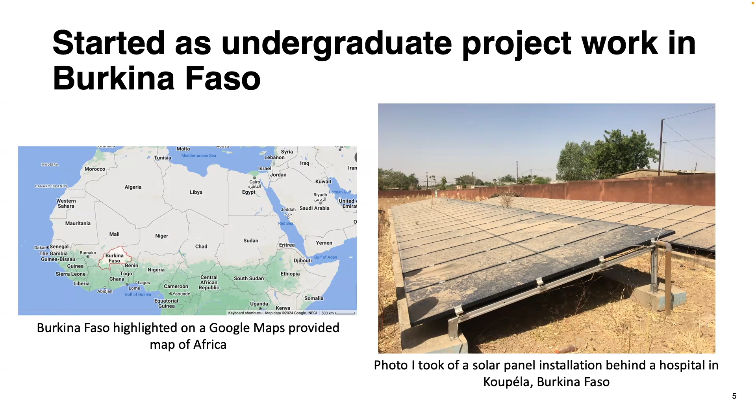One of the primary reasons was because we noticed we weren't generating enough energy. And so I took a lot of pictures while I was there. Here's a picture I took of the solar panel system behind a hospital that was covered in dust. And as I reflected on my journey in Burkina Faso after returning, I began to ask myself, could desert dust be having a significant impact on solar panels in West Africa?

I've done my graduate studies here at MIT. I was actually working on a different project at the time. But I kept coming back to this question of what is it going to take to be able to get these incubators working and operating while in Burkina Faso. And so that led me to ultimately actually step away from my program after my master's and move to the region to Ashesi University in Ghana to really understand and learn more about what it's going to take to get these systems working in the context.

So what you can see here is that when it's near the Gulf of Guinea, dry, dust-laden air from the Sahara Desert is blowing into the region, being suspended in the atmosphere, and then eventually collecting on the panels. Then, as the Earth continues to rotate around the sun, the ITCZ shifts northward towards the Sahara Desert. You get this blue, which is actually the rain belt. So the rains come, you get the monsoon season, the rains wash the dust out of the atmosphere and also off of the surface of the panels. And then once again in November, the cycle starts again, and you get the Harmattan season. So we expect those seasons between November and March each year.

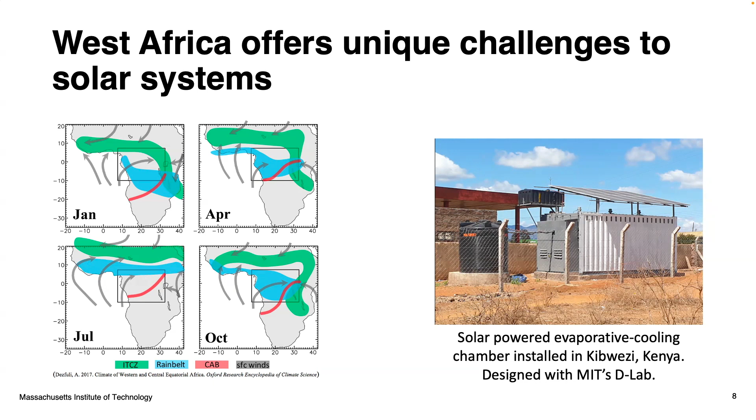So this poses a unique challenge to solar systems in West Africa, but it's not the only challenge. One of the other challenges is related to how we actually implement these solar systems in the region. So this is an example of a project I worked on with MIT's D-Lab. We're developing solar-powered evaporative cooling chambers to keep vegetables and fruits from spoiling due to the environment and the heat. And so what you notice here is that this is what I call a decentralized system. It's not connected to a grid. It's not part of a solar farm. It's operating individually and has a unique set of requirements.

And additionally, you can see these images here. This image I took on a roadside in Accra, Ghana, where you can see these solar panels installed on top of these towers. Not entirely sure what they're powering, but we know that you see them everywhere. The same is true in other parts of the planet as well, where we see this example in Zimbabwe of these solar-powered street lamps.

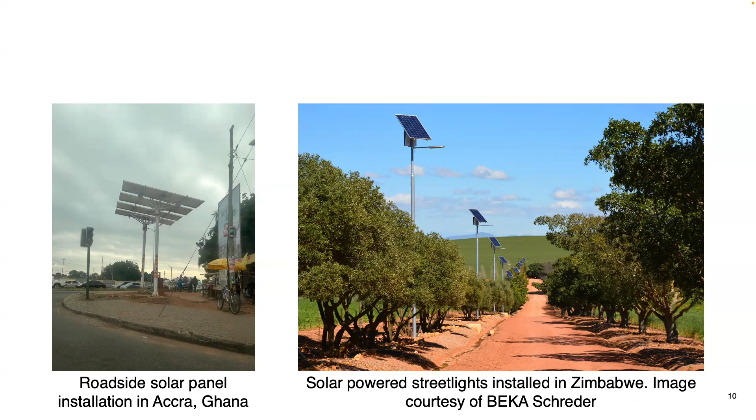Now, in general, as I mentioned, these are going to have very different requirements than centralized systems, which might be more common in the global north, for example. So on the left, we can look at what's more like a solar farm that you might be familiar with. The capacities are much bigger. We're talking on the megawatt scale. And additionally, the way these projects work is that they're typically financed by investors who are looking to get 25 or 30-year returns in energy sales on an energy market.

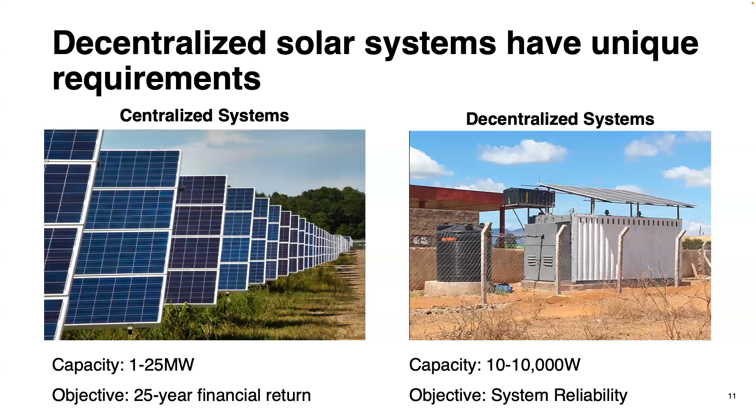In contrast, these decentralized systems, like the one I'm working on with MIT's D-Lab, oftentimes are much smaller, sometimes as small as 10 watts just to keep a light on. And many times the objective is actually system reliability. Can we make sure that these crops don't spoil in this environment? That's going to be important. We're going to come back to that.

So these decentralized systems are being used to improve electricity access, especially in this region. As you might know, 750 million people still lack access to electricity globally, and most people without this electricity access are living in rural areas. So decentralized PV is one way that we can begin to get energy to people without the expensive costs of establishing grid lines that go from major cities all the way to these rural areas.

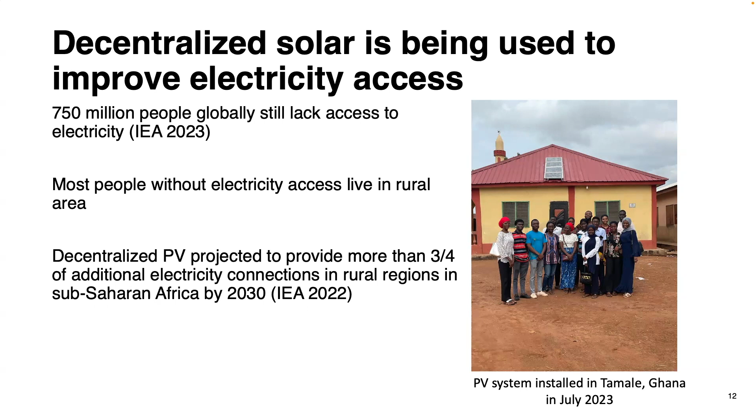Now, the easiest, clearest thing you can do is get up there and clean the panels off. But I want to also show you this picture of when we're actually installing it. If you look closely, you can actually see that these are two wooden ladders that have been nailed together. And this is actually a tin roof, which isn't the most sturdy, and so it can be quite dangerous.

Even in the United States, according to the U.S. Bureau of Labor Statistics, right now we're looking at a chart of fatal work injury rates per 100,000 workers. These are some of the most dangerous jobs you can do in the U.S. You can see that logging is particularly dangerous, but roofers is right up there at number 2. So setting people up to clean the panels, sure, you can do it, but there can potentially be quite a bit of risk involved if you were to do this.

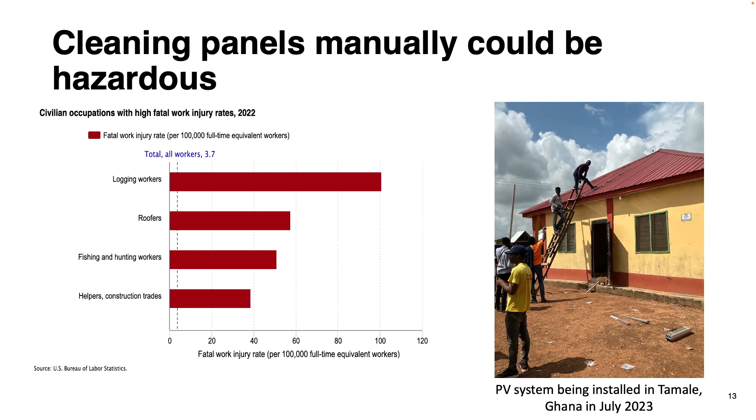So all these experiences came together to try and answer this question of could dust be having a significant impact on these panels in West Africa. My hypothesis is yes, they are having significant impacts, and that these effects can be effectively mitigated. So with that, we will get into the background where I will explain some of the things we need to know to be able to get into the meat of it in the next couple of chapters.

All right, here we go. So we're going to be using some key terms. One are aerosols. This refers to small floating particles in the atmosphere, and in particular, we're going to be talking about aerosol optical depth, which is the measure of the total amount of aerosols from the surface to the top of the atmosphere. Additionally, we're going to be talking about particulate matter concentration. This is an amount of particles by mass per unit volume, and this really refers to the amount of aerosols near the surface as opposed to in the entire atmosphere column.

In particular, I want to make sure we understand those different sizes. You might have heard the term PM2.5 or PM10. This refers to the aerodynamic diameter of the particulates in the atmosphere. And then also their origin really matters here. They can sometimes have a natural origin. We're referring to mineral dust from the Sahara Desert, for example, or anthropogenic, which are generated by human activities like running your car, burning trash, etc.

And so this is an example of dust soiling, which is another term I'll be using quite frequently. This refers to the dust that settles onto the surface of the panels. This is going to reduce power output. We can quantify that by using the soiling ratio. This is a number between 0 and 1. 1 means you have a perfectly clean panel, so things are operating perfectly fine. 0.5 means you're losing 50% of power output, etc. We can also use that and invert it to get the soiling loss ratio.

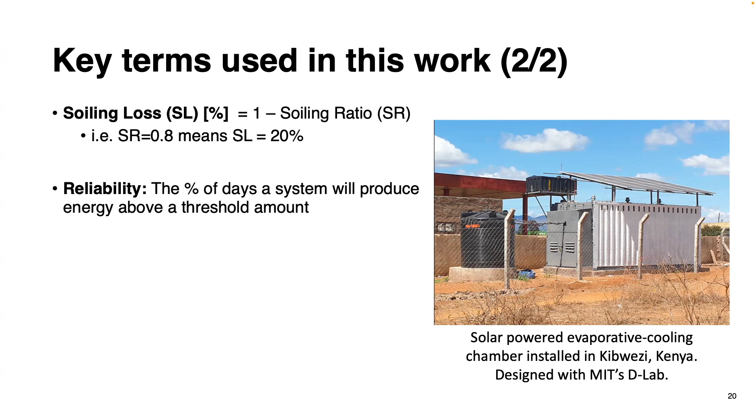Okay. Throughout this thesis, I'll be attempting to answer these guiding questions. How much is the dust soiling impacting these PV systems? How much are the dust aerosols impacting these PV systems? And additionally, we're going to propose a novel mitigation method, shape-enhanced aerodynamic dust removal. We want to assess if it's going to be effective for PV systems in West Africa.

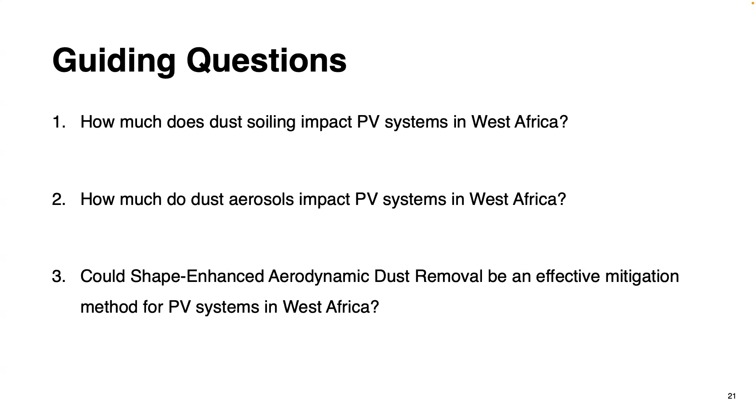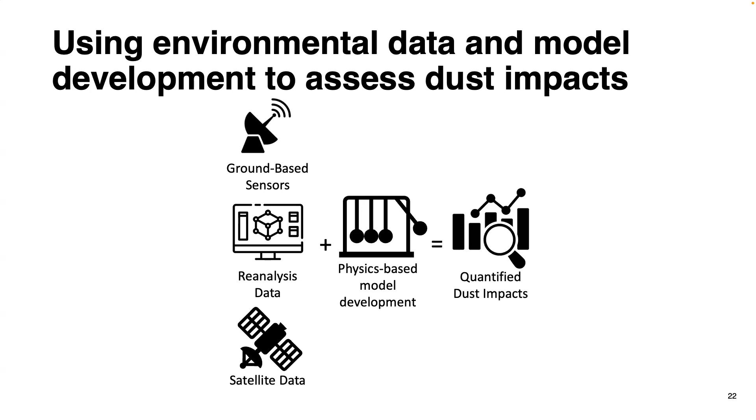To answer these questions, I'll be using environmental data and model development in order to assess the impacts. I'm going to be using several kinds of data sources, which I'll get into detail in the next slide. These are going to be combined with first principles physics-based models using information we get from literature in order to quantify these dust impacts on the power output of panels, as well as to assess this novel mitigation strategy.

Going into detail about the data sets used in the study, we're going to be relying a lot on ground-based systems. These offer really high-quality reference-grade measurements that we can use to do things like calibrate satellites, for example. The problem is that within West Africa, there's not a lot of them. So we're going to make use of them as we can, but we really need to supplement them with satellite-based and other kinds of data.

Satellite allows us to get varying temporal and spatial resolution. Many times the data sets that we're using are actually assimilating a lot of observations from several different satellites. And this can sometimes give us improved accuracy. For example, we're going to be using the Washington University in St. Louis data set that I got from collaborators.

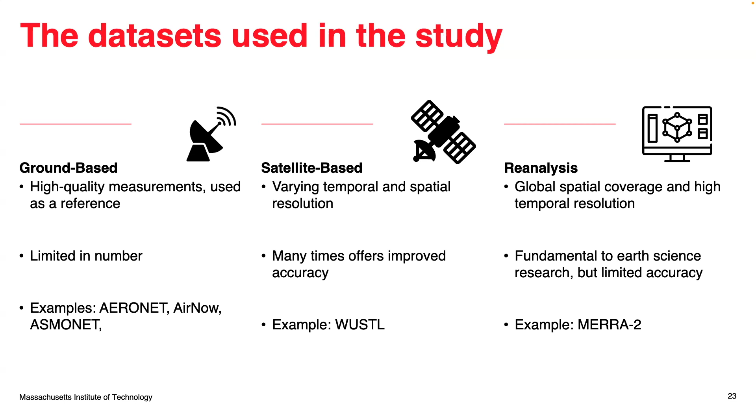Additionally, reanalysis data refers to data that is using a combination of ground-based and satellite-based, as well as models that they've developed in order to get these really great global spatial coverage, really nice temporal resolution data sets that researchers love to use in order to ask and answer earth science questions. The issue with this one is that there can sometimes be limited accuracy. And you'll see that more later in this presentation. In particular, I'm going to be using MERRA-2, which is one of the reanalysis data sets that NASA produces.

All right. Throughout this study, I'm going to be looking at two major dust impacts. One are dust aerosols, which are going to absorb and scatter the sunlight, reducing the amount of sunlight that's going to actually reach the surface of the panels. And then dust soiling is going to further reduce the amount of sunlight that actually reaches the photovoltaic materials within the solar panel. And so taken together, we can quantify the total amount of dust impacts, which I will begin to do next.

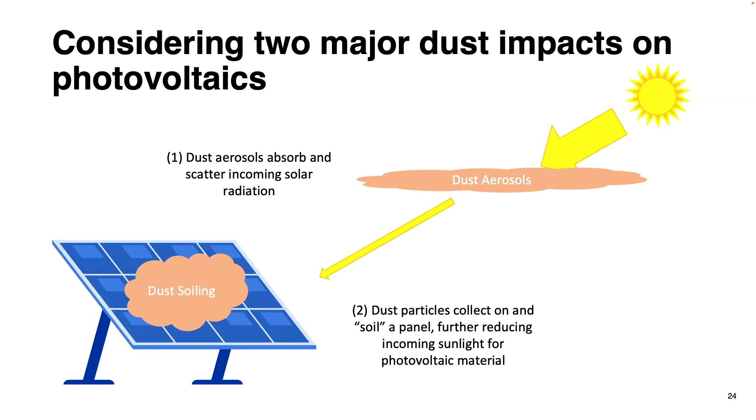All right, let me take a drink.

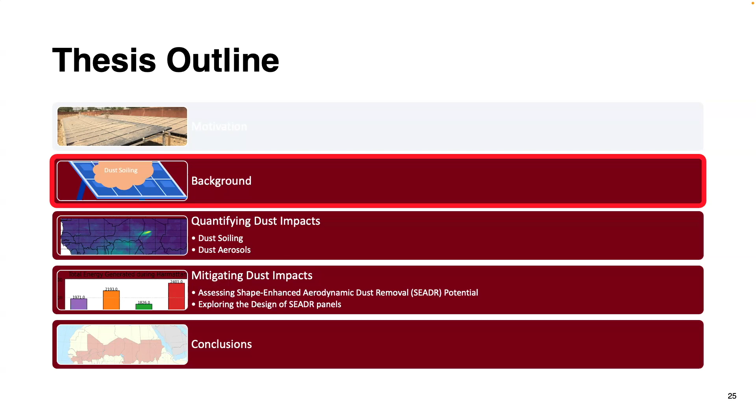All right, let's answer these questions. Here we go. Okay, so I want to answer what the impact of the dust is on these solar panels. We do know that dust impacts have actually been estimated for around the world. So if we look at previous studies, like this one done with an MIT researcher, they quantified about 4 to 12% of aerosol losses are due to air pollution in these major cities that they looked at.

In another study done in the Atacama Desert in Chile, they quantified that dust soiling, the dust that collects on the surface of panels, reduces up to 40% of the energy annually in some desert regions. Additionally, another study using the MERRA-2 data set quantified that more than 2/3 of the total dust losses are actually due to dust soiling as opposed to dust aerosols. The problem is that we're not sure how well these measurements are going to apply to the global south.

So for example, if you look at this other study done by Mithhu et al. 2021, you can see that what they did is they took these ground measurements and they interpolated it to get global coverage of estimates for quantifying the soiling by the soiling rate in percent per day. So how much additional loss do you get each day? That's what they quantified it by. You can see that these red dots are concentrated in the US, Europe, parts of the Middle East region, but not a lot in South America and not a lot in Africa.

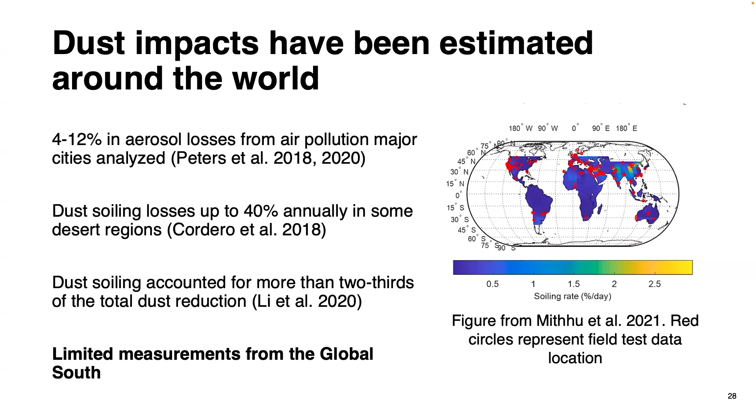You can imagine that if you want to interpolate from these data sets, the accuracy for regions that we care about might not be the best. In order to overcome that, you can use these satellite and reanalysis-based data sets. And that's actually what researchers do. They use NASA MERRA-2 to get estimates for dust impacts throughout the entire world. But the accuracy of these data sources is also questionable.

In particular, our objectives for the study are going to be quantifying dust impacts on PV power and reliability, quantifying the implications of these data limitations. We're going to relate these dust impacts into the design and operation of these decentralized systems in particular. And then finally, we want to determine pathways to mitigate these effects in the region.

So, where do we begin? We're going to start by using these physics-based models. As I mentioned before, we're going to be taking these PM concentration and other environmental data sets, developing these physics-based models that tell us how much is going to collect on the surface of panels, relate the mass of the dust on the panels to the amount of power loss here.

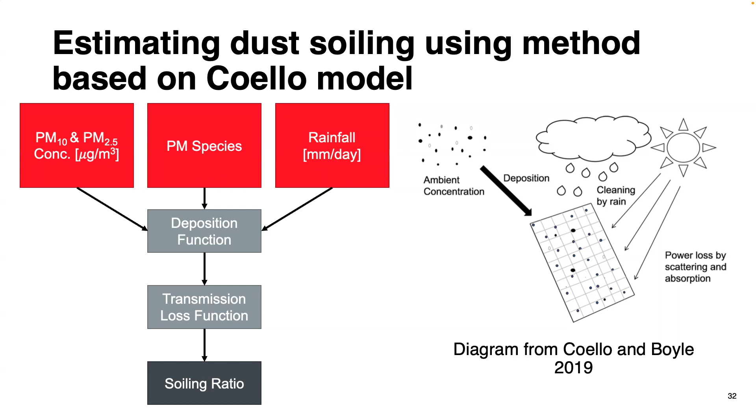We're also going to be comparing the data sets that we're using to ground-based data from the US EPA's AirNow network. This is a set of ground-based air pollution monitoring sensors that are established within the US embassies in major cities in West Africa. The benefit is that we get reference grade data. The downside is they're in major cities, so they don't necessarily represent the rural areas. Additionally, there's just not a lot of them.

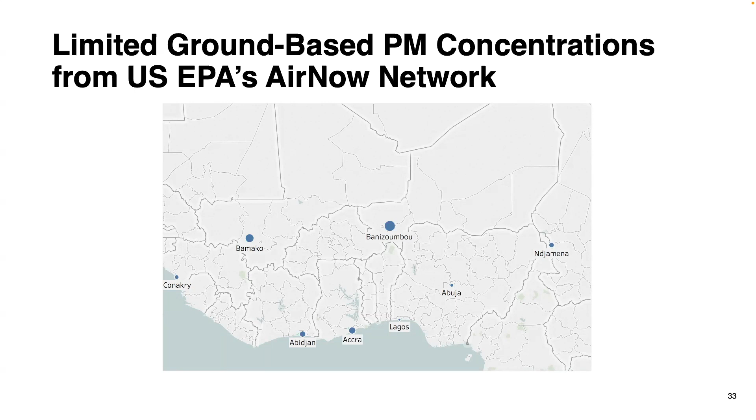This is actually a huge amount of area. There's not a lot of monitors. We're going to do the best we got. The size of the circles represents the amount of data we get. A lot of these were also very recently installed, 2020, 2021. We don't have as much data as we'd really like to have. But using these methods, we're able to begin to quantify these dust impacts.

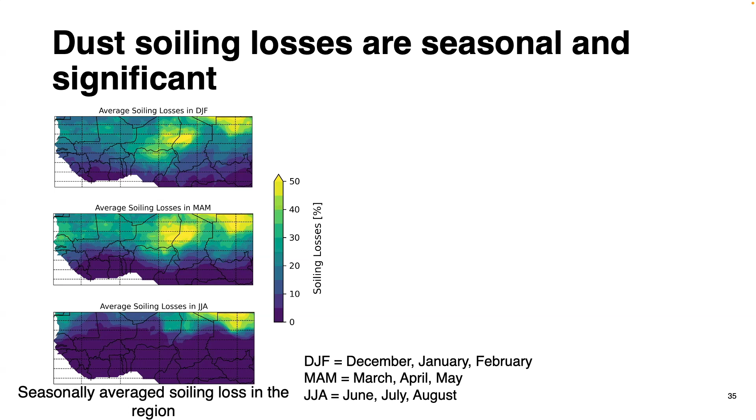As we get into March, April, May, this begins to recede as the rain belt comes in, as I described earlier. Until we get to the summer monsoon season, the rains have washed the dust away. We don't have as much soiling loss. You also can see this hot spot of yellow now in Chad. This is actually the Bodélé depression, which is one of the largest sources of dust on the planet. It's known to carry dust all the way to the Amazon rainforest, for example.

What we're going to do is focus in on Ilorin, which is a city in Nigeria, and we're going to begin to capture the amount of aerosols in the atmosphere using aerosol optical depth. I want to draw your attention to two things. But first, let's describe these colors.

These represent the different data sets that I'm using to get the environmental data. Blue is ground-based. This is our ground-based truth. The orange represents the reanalysis data set, and the green represents the satellite-based. What I want to show you is that you can clearly see the Harmattan seasons here. You get these peaks at about the same time each year.

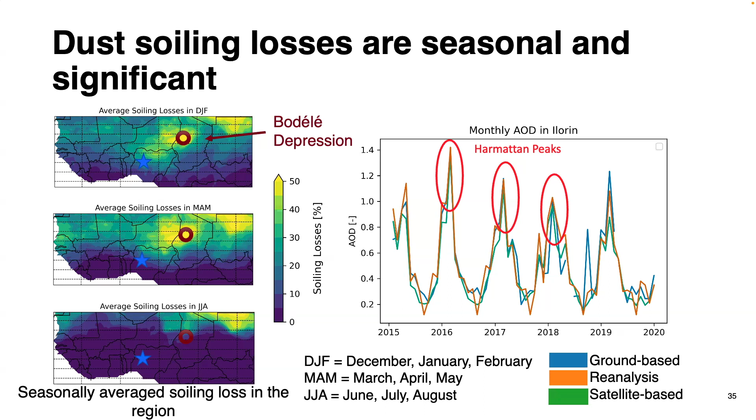What I also want to highlight is the magnitude of the AOD. We're looking at monthly averages of 1.2, 1.4. For reference, in the United States, the annual average is 0.2. So these are an order of magnitude higher. These are also monthly average data. When we talk about daily aerosol amounts, we can sometimes see AOD values above 3, which is really high. So the data sets can definitely impact how we design, how we assess these PV systems.

So using MERRA-2, if you're going to, for example, design a system to work 95% of the time, and you use the MERRA-2 data to do that, you're going to undersize your system by up to 9% using the MERRA-2 data in this region. By doing the bias correction and by applying other methods in our model development to make improvements, we're able to make a 50% improvement in accuracy when compared to ground-based measurements of soiling and compared to literature models. So even though we're not capturing the full amount of the soiling, we're doing okay.

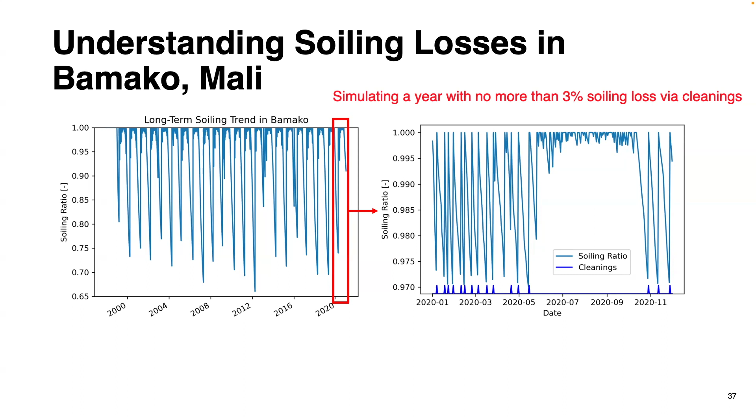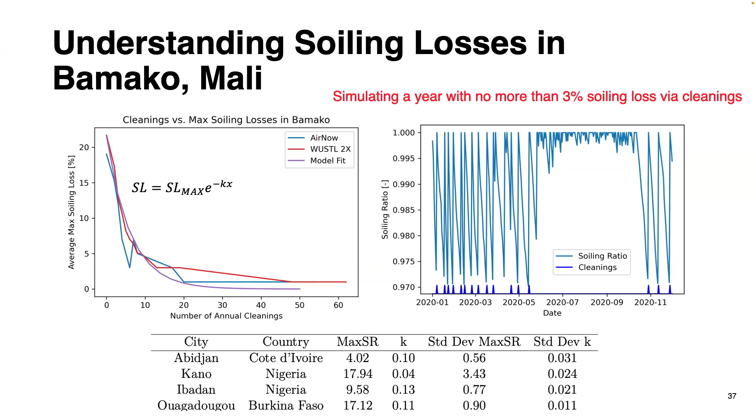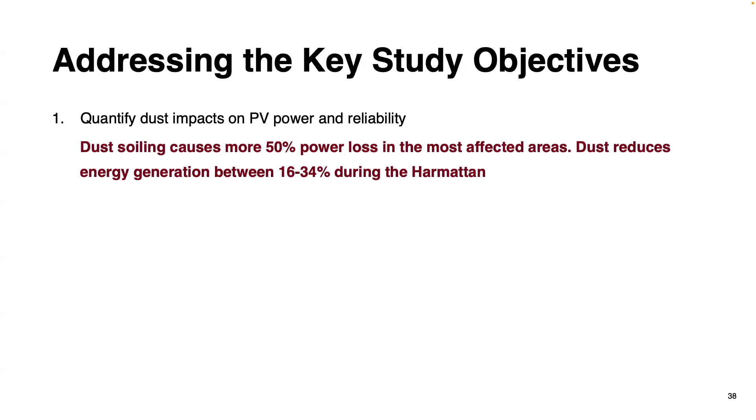Right. Now we can come back to these study objectives. We can quantify dust impacts on power and reliability. Yes, dust soiling can cause more than 50% power loss in most affected areas. And as I showed in the paper, dust also reduces energy generation by up to 16 and 34% during the Harmattan season. Can we quantify the implications of regional data limitations? Yes, we showed that MERRA-2 is going to underestimate the highest impacts in soiling by 33%, and you're going to undersize your systems by up to 9%.

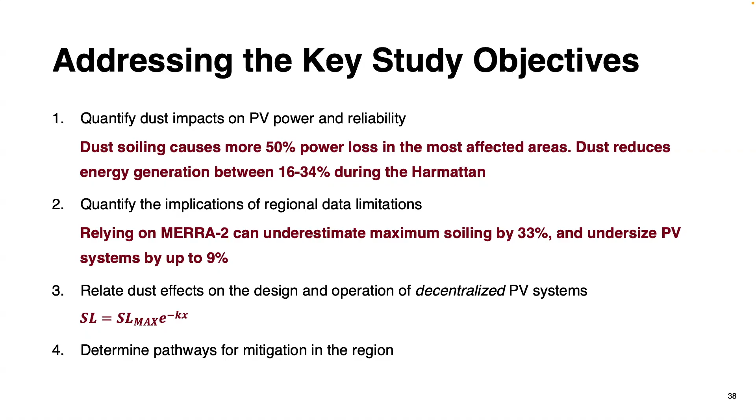We also can begin to relate these dust effects to the design operations of these decentralized PV systems. And what about mitigating? Well, we haven't actually done that yet, and so to do that, we're going to need to combine with the soiling aerosol models to really understand what's happening.

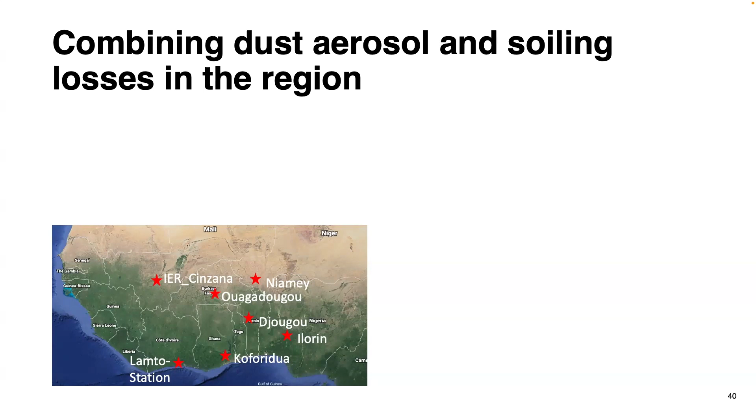Okay, so we're going to combine these models, and in particular, we're going to be comparing them to these AeroNet locations. AeroNet describes this NASA network of robots that are going to capture the amount of aerosols in the atmosphere in particular locations. I'm going to draw to a couple things. Cinzana, Ouagadougou, Niamey are in the north, Lamto Station, Koforidua in the south, Djougou and Ilorin are somewhere in between.

Additionally, we can begin to see that in these northern locations, a lot of the impacts are actually coming from dust soiling. So we're going to take this chart, we're going to flip it so that it shows the relative contributions of each, so all these go to 100%. What this allows us to do is see very visually where the largest impacts are coming from. And we see that in these northern locations, over 60% is coming from dust soiling. However, we see in these more southern locations that most of the impacts are actually from natural dust aerosols from the Sahara Desert.

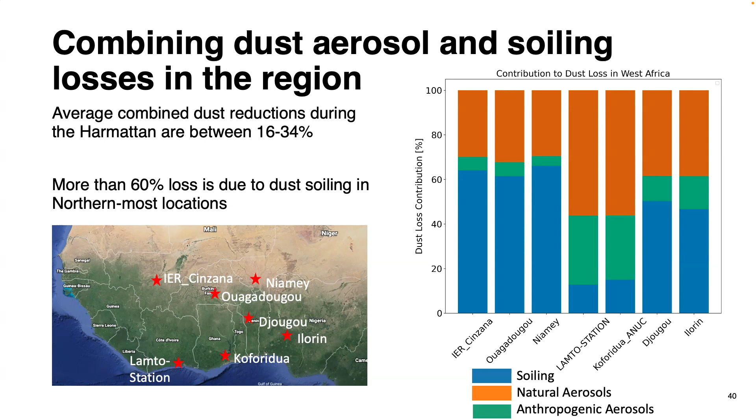What this shows us is that most of the impacts of dust in these locations, you can't actually do much about, right? Unless you can extract the dust out of the atmosphere, there's not much you can do about it. If there's dust in the atmosphere, you're going to reduce energy. The best thing you can do is target this green, which is anthropogenic aerosols. That means that you can pass legislation to improve the air pollution and reduce those impacts on the solar panels.

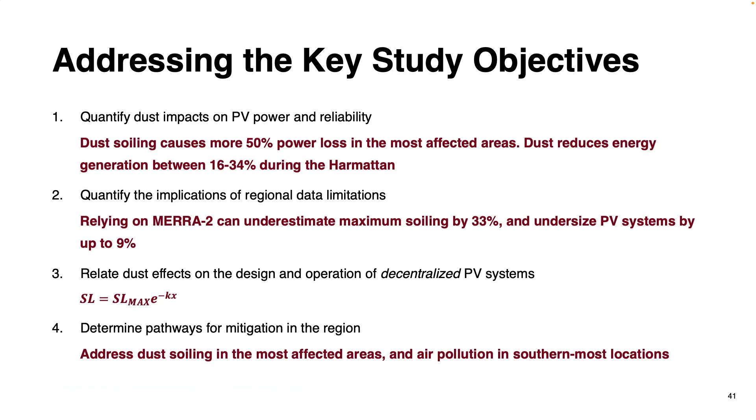So that allows us to determine the pathways of mitigation. We know that depending on which area you're in, if you're in the north, where you're most affected by the dust, we need to target the dust soiling. However, if you're further south, air pollution is going to be the biggest driver of the dust impacts for your particular location. This also allows us to answer our overall guiding questions that I asked in the very beginning.

How much does dust soiling impact the PV systems? More than 50% power loss. How much do dust aerosols impact these systems? It's going to give us reduced energy generation by up to 34% in the Harmattan, which I showed in the document.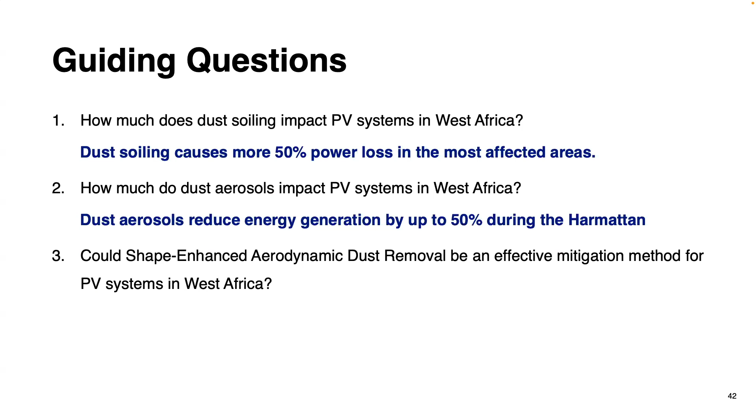And then we now need to answer this: could shape-enhanced aerodynamic dust removal be an effective mitigation method? But I also want to highlight that these were presented and published. So we published our dust soiling results in Applied Energy in 2023 and presented the dust aerosol results at the fall meeting of the AGU.

All right, so now we need to get to this last and third question: could shape-enhanced aerodynamic dust removal be an effective mitigation method? Let's do it. So we're looking at ways to mitigate dust soiling because, as we've identified, the most affected areas are mostly affected by dust soiling. So we need to do something about it.

There's lots of things you can do. As I mentioned before, you can try to target the air pollution. You can send people up to the panels to manually wash it. A lot of people have looked at robotic and other tech-assisted cleanings. For example, these electrostatic methods, as actually done down the hallway from researchers at MIT, where you basically create a voltage potential, charge the particles, and use that to remove them off the glass surface.

There's other techniques like dew prevention, so you can invert the panels overnight to make sure that they don't collect dew, which helps collect dust. And then there's also passive techniques. One of the most popular is to do a coating, particularly a hydrophobic coating. That's going to change the way the water beads up on the surface and impact the way that dust ultimately collects onto the surface.

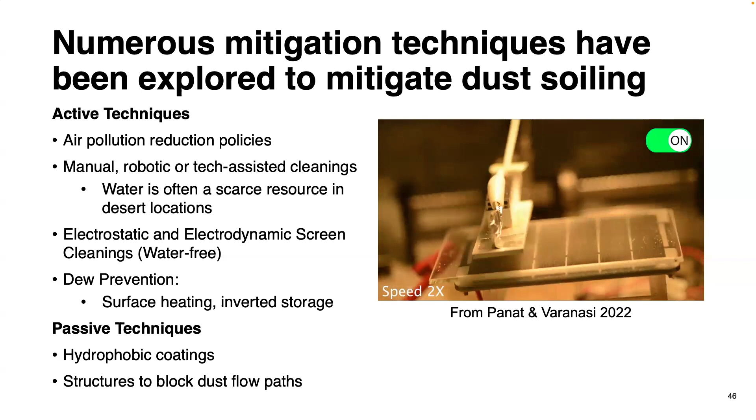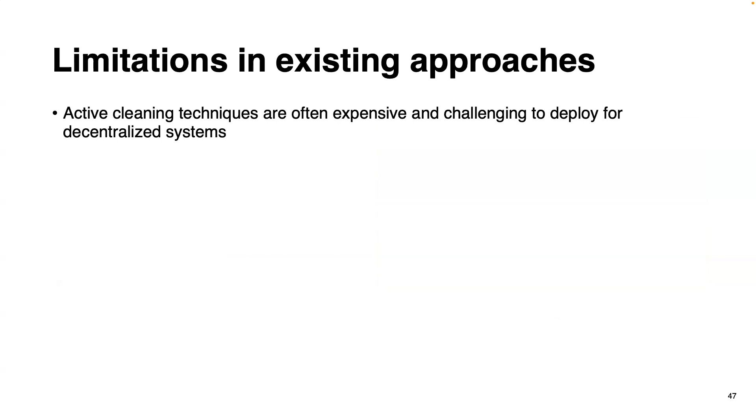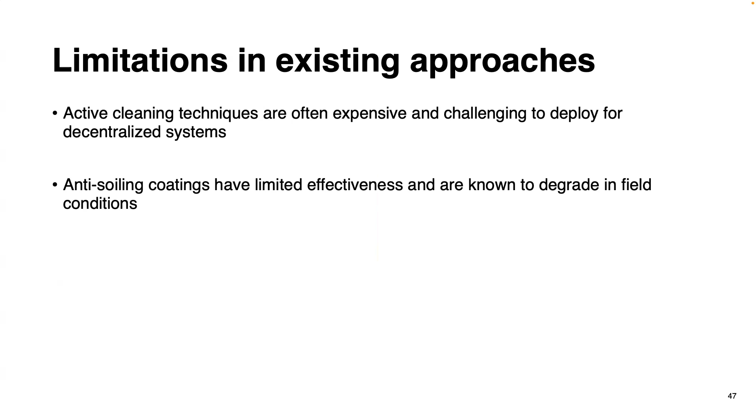These do have limitations. For example, these active cleaning techniques are often really expensive. You can't necessarily put the electrostatic device, especially not on these decentralized systems where you might have an entire street lined up with these solar powered telephone poles. It'll be a challenge. Additionally, these coatings are effective, but they do have limited effectiveness because they ultimately degrade over time. And additionally, they do not necessarily reduce the dust effects for all sizes of dust, for example.

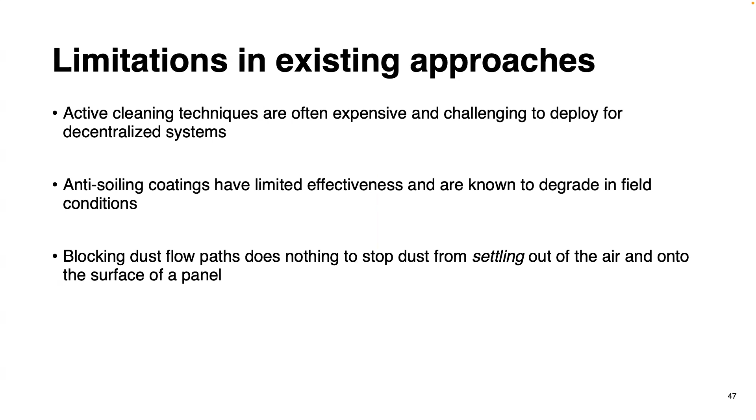Other methods also have some limitations. For example, blocking the dust flow path, like trying to keep the dust from going in from the wind, does nothing to keep it from settling out of the atmosphere onto the surface. So here the literature gap is that we need mitigation methods for these decentralized PV systems operating in the global south in particular, and a passive dust removal method that is both durable and cost effective would really be ideal here. So to do that, we propose shape-enhanced aerodynamic dust removal, or SEADR, as we're calling it.

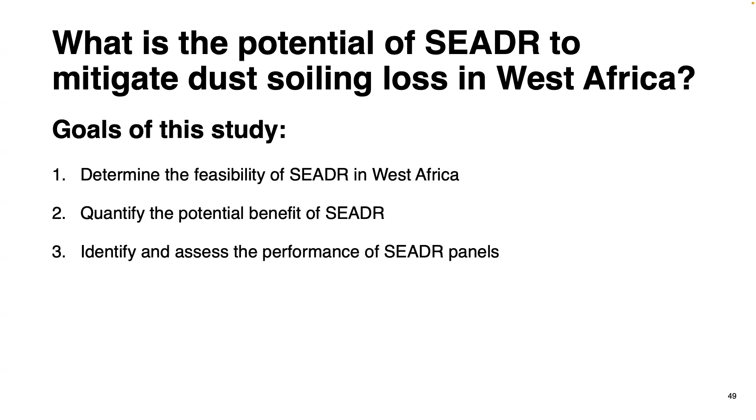So to begin, I'll get into the fundamental physics. We're looking at the adhesion and removal physics of these particulates on the surface. I'm going to briefly describe this free body diagram. We have a particulate on a glass surface. There's a couple major forces, namely the van der Waals force, which refers to these atomistic forces that are going to keep these surfaces connected, and additionally the capillary force, which refers to the water that's going to form these bridges in the corners. They adhere to the surface. It's a really powerful force relative to the size of the particulate.

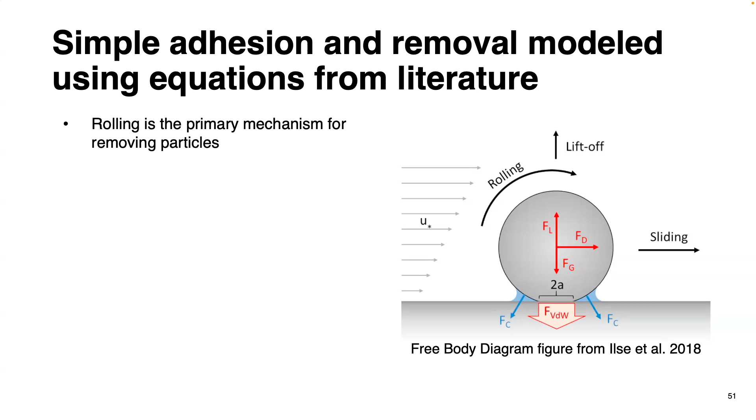We're going to imagine this incoming wind flow. This U star value refers to the amount of shear that's going to be acting on the surface in the viscous sublayer that the particulate sits in. And then there's a couple ways that we can remove the particulates, either via sliding, lift off, or rolling. Literature suggests that you're really just going to roll on the panel. All the other methods almost never happen realistically. So we're going to be identifying rolling. We're going to quantify how much force is going to be imparted by this incoming wind, and using that, we can define this threshold so we can estimate when the particulate is going to roll off the surface of the panel.

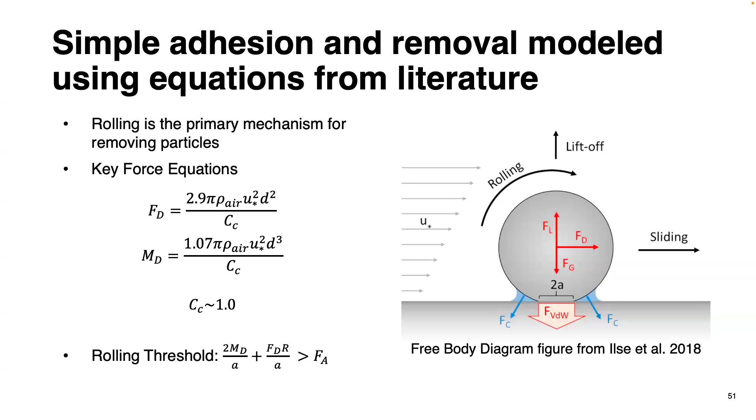So by understanding the physics, we can begin to predict if it's going to roll off the panel based on the incoming wind flow. And so by doing this, we can begin to also highlight which parameters are driving our removal of particulates, or in our case, really increasing the shear stress to apply the force to get it off of the surface. And we find that particle diameter, shear velocity, and relative humidity are really strong drivers. If the relative humidity is low enough, you don't get that capillary force.

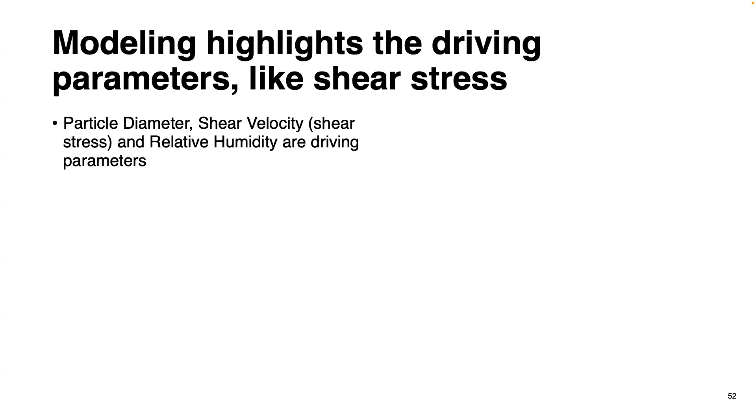So what we can do now is apply these physics models to understand, if we were to arbitrarily increase the shear stress, what kind of results would that have in terms of decreasing the amount of mass on the surface of the panels? Mass is one of the driving variables that we use to capture the power output for the panels when we're doing dust-laden modeling. And we're going to be using Harmattan particle size data from literature. We're going to arbitrarily increase the shear stress on the particulate, then quantify the additional mass removed relative to a reference case, and see what impact increasing the shear stress by a factor would have.

And so what you see here are different colored lines. These represent different wind speeds. You need a certain threshold wind speed to get any of the dust off. But as you increase the wind speeds, they're going to eventually converge because the next smallest particle is going to require exponentially more wind speed in order to get off. Once you get very small, there's almost nothing you can do to get them off the surface. This is why PM2.5 is so bad for your health as well. Your body can't remove it.

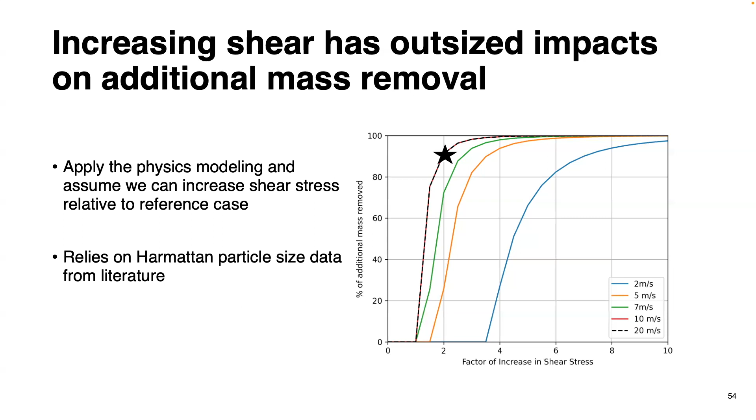And so we see that a factor of 2 increase, for example, would get 91.3% additional mass removed relative to the reference panel. So if we're able to do a little bit of increase in shear stress by changing the shape, for example, it's going to have large results in decreasing the mass. Even if we can get 1.5, for example, that might still give us 50%.

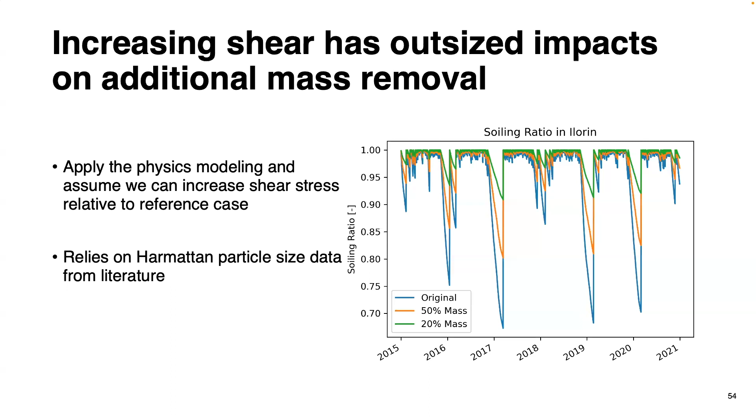And so if we apply that to our dust-laden model with 50% less mass collecting on the surface of the panels, we can see that we can reduce the highest amounts of soiling ratio, in this case in the lower end, by quite a bit.

So this allows us to begin to answer some of the key objectives. What is the feasibility of SEADR? Well, we see that given the uniquely high wind speeds and uniquely low relative humidities in this particular part of the world, these are really conducive conditions for getting the particles off the surface by using wind.

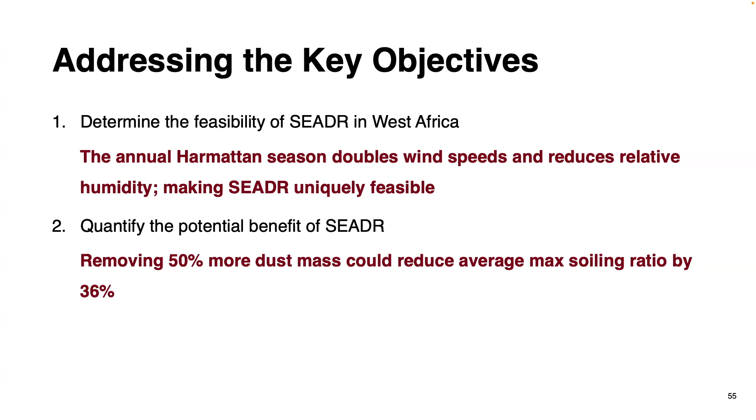Additionally, we can begin to quantify the benefit of SEADR, which we see in the previous chart, removes 50% more dust mass. Removing 50% more dust mass would reduce on average the soiling ratio by 30%, 36% in the lower end of this example. The final step is now to identify and assess the performance of these SEADR shapes and SEADR panels. So we're also going to do that.

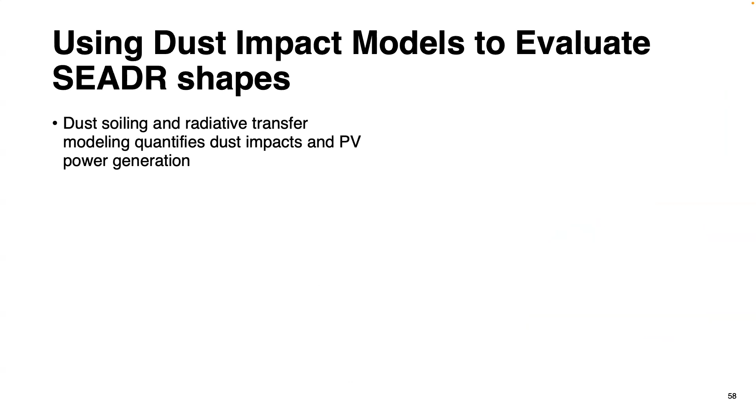We're also going to define a reference case of about 100 watts in power output. So it's 1 meter in length, and the width is 50% of the length of it at 0.5 meters. That'll be our reference case when we're comparing the shear stress. So we're going to be integrating all the models that we've developed to this point in order to assess the impacts of the SEADR shapes onto dust soiling impacts.

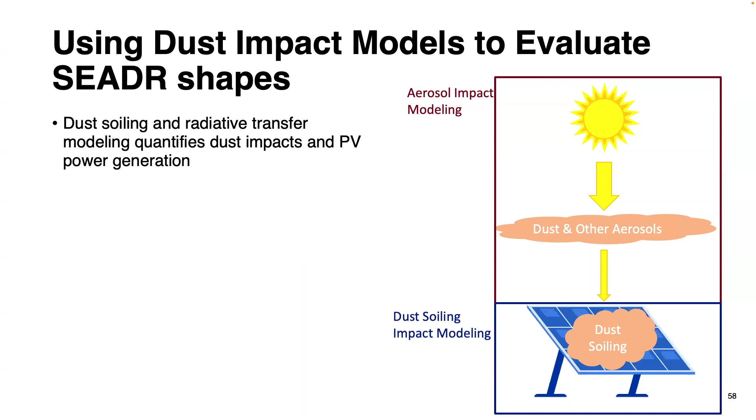And so we're going to start with this aerosol impact model, which really is a radiative transfer model to estimate how the different angles are going to correspond with how much energy you get onto the photovoltaic surface. We have this dust soiling impact model that translates the PM concentrations into the amount that collects on the panels and the power output. And then we're combining it with those fundamental physics models that we talked about a few slides ago.

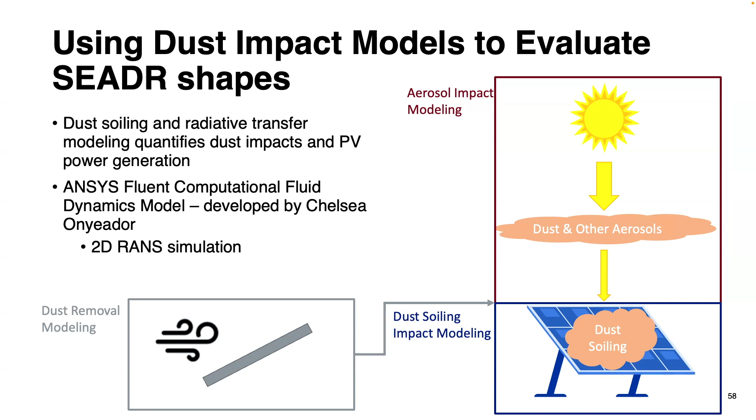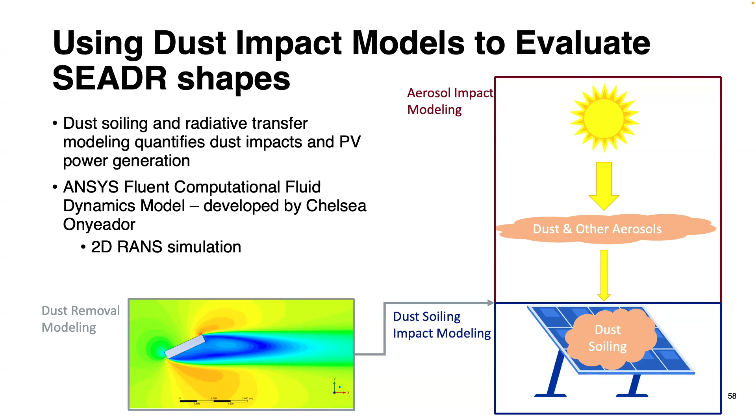So we also need to begin to understand the limits of things we can do for these geometries. And so we're going to first begin this by mapping the design space and identifying those limits. The way this works is that we have some parameters that we can change. We're going to compare an unsoiled SEADR intervention with a more conventional panel that does collect dust. What does that mean? This is going to be our comparison point.

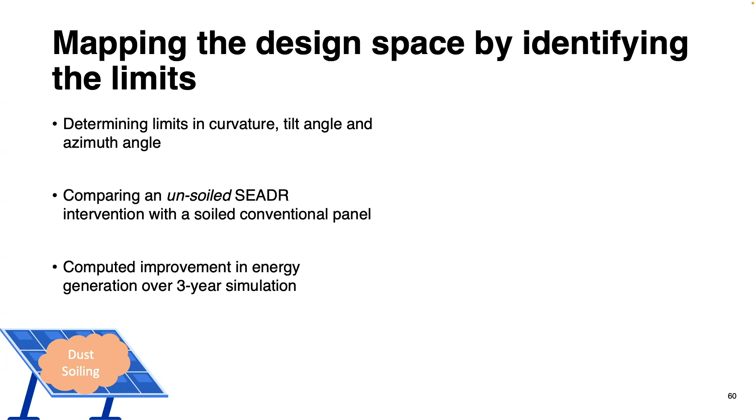We have this panel, it's collecting dust, it's conventional. We want to make sure that anything we do to the panel is going to outperform this in terms of generating energy. So we're going to be looking at a 3-year simulation of generating energy using the SEADR panel versus this dust soiling panel. And we're going to be quantifying the improvement in terms of how much more energy you get from using the SEADR panel that is completely soil-free. So we're going to assume that SEADR works perfectly, no dust collects on it. We're going to compare it to this.

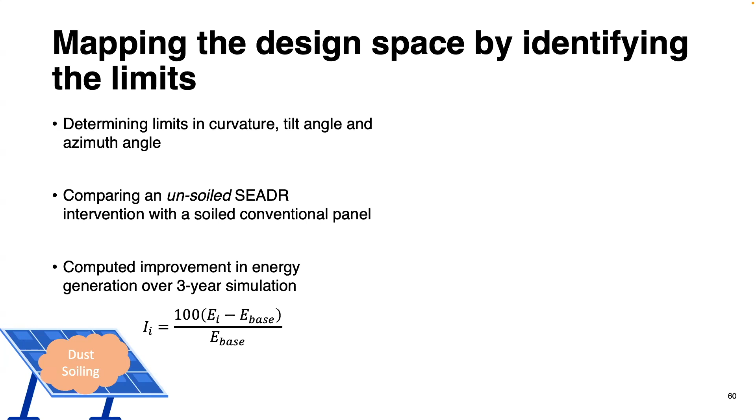We want to make sure that it's going to be worth it. So to do that, we get charts like this. This is the total energy generated during the Harmattan season over this 3-year simulation. We have this baseline panel with no soil. This orange case represents collected soil. And in this green case, we're going to have a curved surface operating in Niamey. And we want to make sure that this green bar is ahead of this orange bar. This means we have a positive improvement. So this is how we can define the limits of curvature in this case.

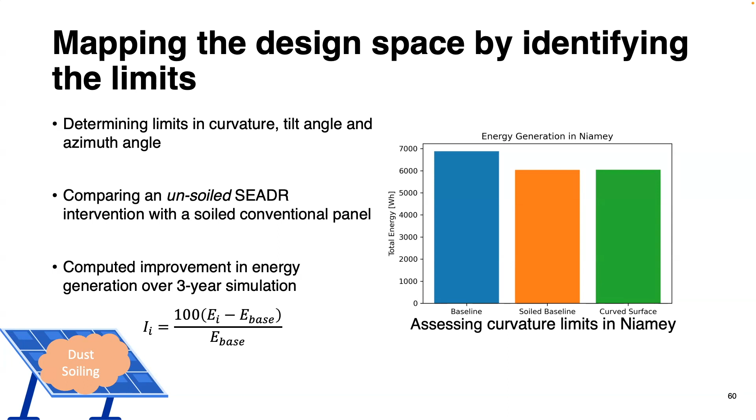We're going to apply this to a lot of these other geometric parameters like tilt angle. We get plots like this. So on the x-axis is the tilt angle, and we're increasing it as we go to the right. We have an improvement here where this cutoff line is at 0. That means anything below this line is no longer worth it. For a given solar panel in a given location, there's usually an optimal tilt angle that you can pick. And so you can see that in Niamey, it's around 15 in this case, where we're getting the peak improvement in terms of comparing our tilted panel to a flat panel that has lots of dust.

Once we begin to tilt it beyond this point, we're going to get less and less improvement until we hit this cutoff point around 46 degrees in terms of the tilt angle. Anything beyond that is no longer worth it. If we tilt it beyond that, even if we could remove all the dust, it's not going to be worth it because you're generating so much less energy. It's not worth making that change.

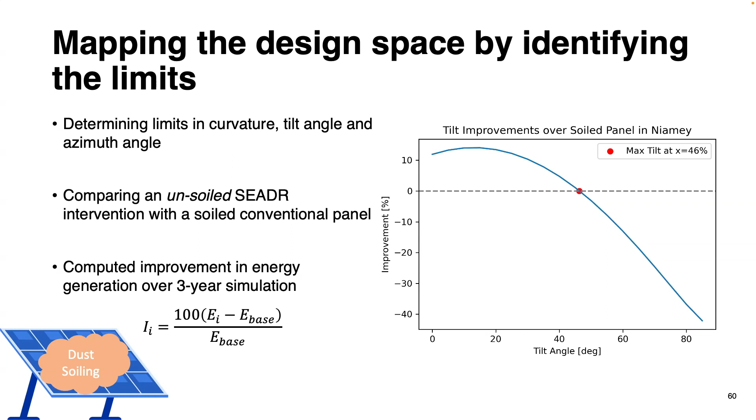So when we do that, we're able to define the geometric limits that we'll be exploring in terms of these SEADR shapes. So I compute the range of tilt angles, azimuth angles, and curvature that we can account for. Curvature ratio just refers to the amount of bending that we can have. The deeper the curve, the lower this number. At a curvature ratio of 2, it's a full circle. 15 is more like a flat plate.

I choose the wind speeds based on the environmental data of the region, and then I arbitrarily chose this at 20% because it's pretty thick relative to what we normally see commercially. These widths are determined based on commercially available panels that I can find at 100 watts and 250 watts in terms of the power output. So we're going to be exploring these limits. We want to see some trends in terms of how we change these things, how that impacts the shear stress, and ultimately the additional dust removed from the surface of a panel.

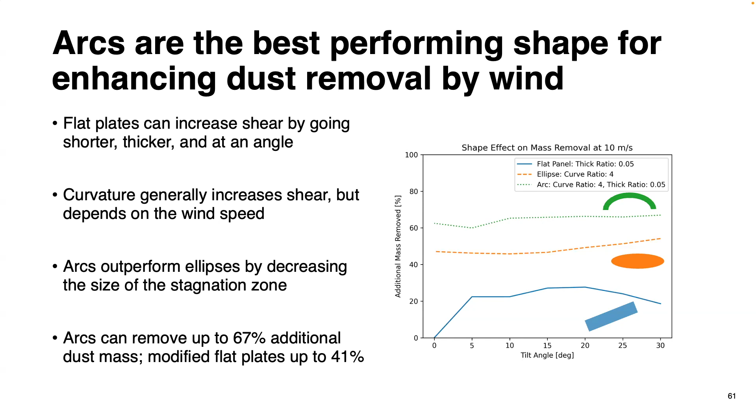And looking at the amount of additional dust removed, you can see we can get up to 67% additional dust removed, whereas with the modified flat plate, thickening it, shortening it, tilting it at an angle, you get up to 41% reduction in terms of the additional mass. All right. Yes, removing mass is a very good thing. That's ultimately what we're aiming for. But really what we're aiming for is improving the energy generation in the region.

So to assess these shapes, we need to estimate how much energy we're going to generate. We're going to pick Niamey because it's one of the dustiest places in the region. And we're going to simulate 3 years of energy generation based on the dominant Harmattan winds.

We're also going to consider 4 reference cases. A reference flat plate that is sitting flat to the ground. These are known to collect a lot of dust. An optimally tilted flat plate when it comes to generating energy. Then we're also going to do some SEADR adjustments. We're going to take that flat plate, thicken it, change it to the angle where we find the greatest increase in average shear stress over the surface. And then finally, this arc shape that we found was able to increase the amount of dust removal.

I want to bring back the reliability term that we mentioned before. It's going to come up again. And essentially, this is when panels produce energy above the threshold amount. So we're evaluating how well these shapes do when it comes to generating energy and removing dust.

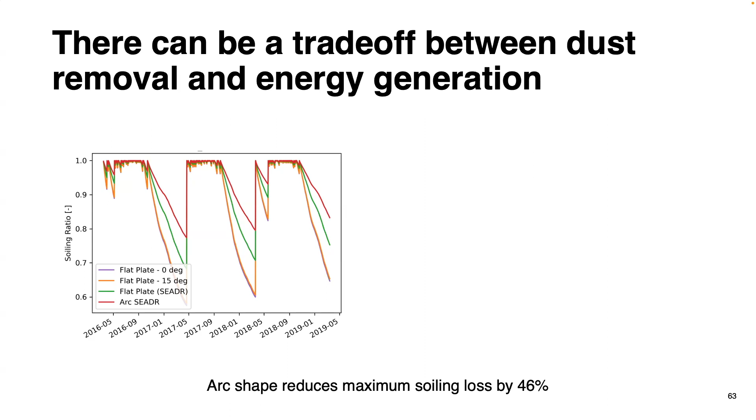When we also consider the energy generated, we do see some benefits. So these are allowed to collect dust. They are optimally tilted and oriented, but they're still collecting dust, and so you're not going to get as much power output as you'd expect. Once you tilt it, you're going to get less gravitational settling, and so you're going to reduce the dust impacts. By switching your panel to face the wind, you're going to significantly reduce the amount of energy generated. So even though the flat panel isn't collecting as much dust, it's not collecting as much energy.

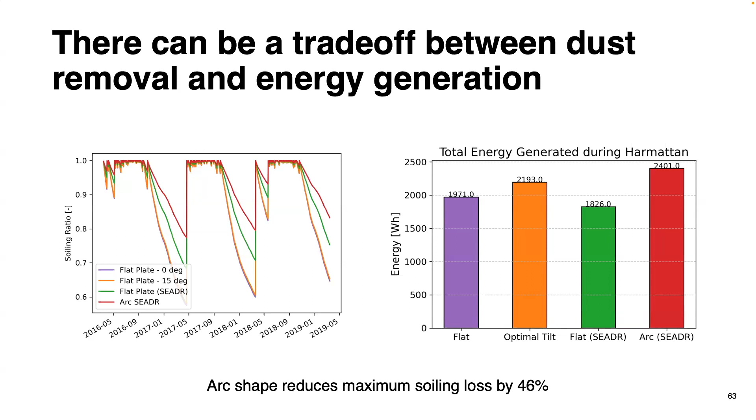And in this case, the arc panel is able to produce more energy than an optimally tilted panel that is allowed to just collect dust. But this is not always the case. So this is looking at Niamey, Niger. We switch to, for example, Cinzana, which is in Mali, another desert area, also part of the northern region of West Africa. You can see that actually the arc panel does not generate more energy than the optimally tilted panel that is literally just collecting dust.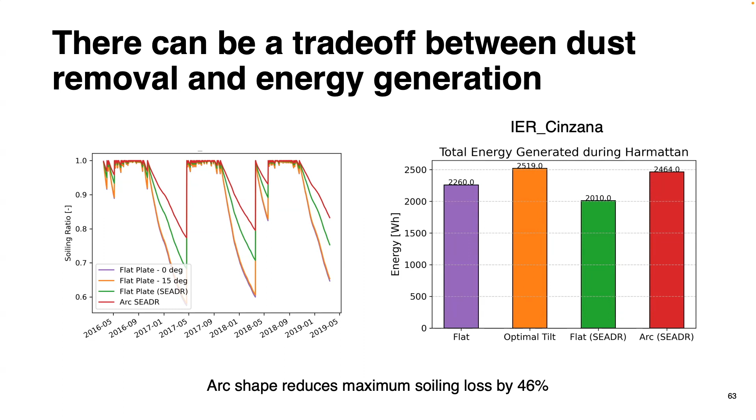And that's because you're not getting as much loss with the depth of the Harmattan. You're really increasing the amount of dust removed from the surface of the panels. So we find that this is going to increase reliability at the 96th percentile by 30%. So this allows us to answer our last objective: identify and assess the performance of SEADR panels.

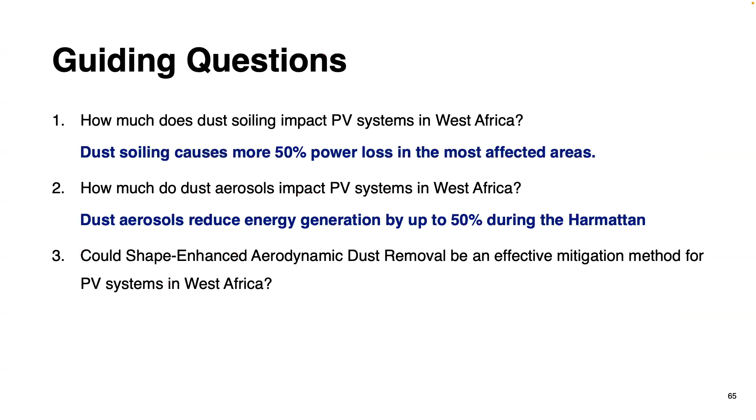It's going to potentially remove up to 67% more dust mass than conventional panels, and you can improve the reliability by 30%. That is particularly important for things like the vegetable cooler. We need to make sure that your vegetables stay cool and don't spoil in your particular climate. This also allows us to answer our final guiding question: could Shape-Enhanced Aerodynamic Dust Removal be effective? Yes, these SEADR shapes can potentially remove more dust and increase reliability.

And as last time, this has also been presented; we presented the SEADR results at the APSDD conference in October.

So this allows us to actually jump to the acknowledgements. I'm gonna do those first because I want to make sure I can have a chance to wipe my tears before we actually get to the questions. So let's do it.

So first, I want to thank my funding sources. I want to thank the Hugh Hampton Young Fellowship, the Martin Fellow, the NASA JPL CERP, which funded the initial effort into this project, MISTI Africa, which has sent me to the continent, the Archie Cornfield Teaching Fellowship, which also took me to the continent, as well as the PKG Social Impact Fellowship, which took me to the continent last Saturday. This is an image when I was working at Ashesi University as a lecturer.

I also want to thank my colleagues, collaborators, and mentors. I want to begin by thanking my committee members, Dr. Andrew Biggis and Olga Kalashnikova. I really appreciate you all being on the call. As you may not know, they're in California and Perth, Australia, so it's quite early and quite late for them. So I really appreciate all of those efforts. Olga, especially, thank you for really taking the chance and funding this research project. I'm really grateful. Professor Henry, I want to thank you as well for continuing to encourage me to do as best as I can and continue to improve the quality of the research.

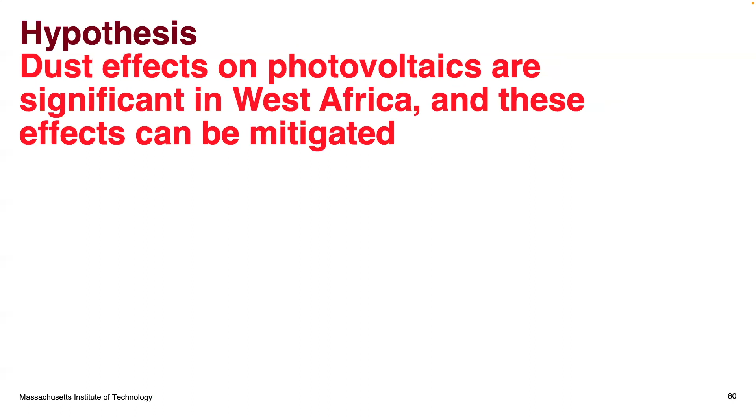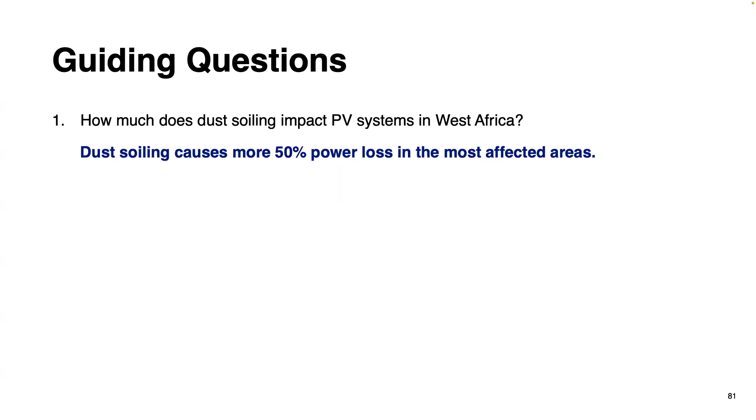I have my guiding question: dust soiling causes more than 50% power loss in most affected areas. In order to answer this first guiding question of whether the dust soiling impacts. My second question: how much of the dust aerosols impact these systems? Both can reduce energy generation by up to 50% during the Harmattan season. And then finally, could SEADR be the effective mitigation method for PV systems in the region? Well, we think that it could remove up to 67% more additional mass just by bending it and potentially improve the reliability by 30%.

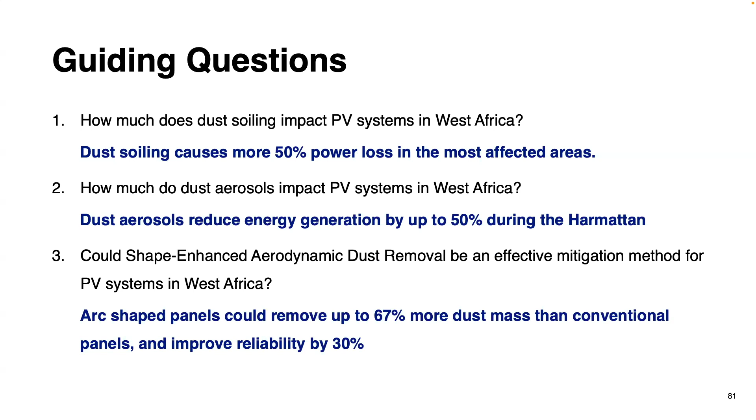We did not only answer these guiding questions, but in the process, we really added significantly to the field. In particular, we've improved the dust impact quantification in the region. So, we developed these environmental modeling techniques that can account for these remote sensing limitations to do things like improve the modeling by 50% in terms of accuracy when compared to existing models. We were also able to develop metrics that allow us to assess these dust losses that are particularly suitable for these decentralized systems, which we know are going to be very important, as opposed to only conventional PV, like the soiling percentage per day.

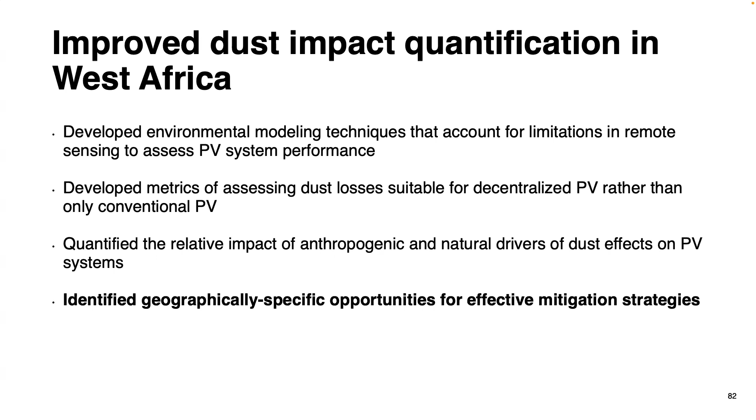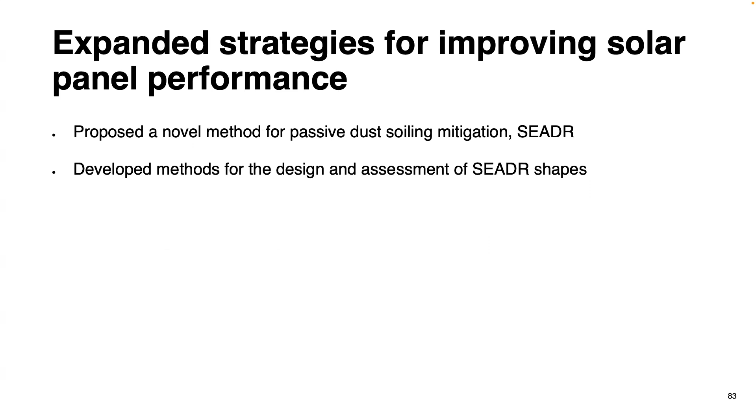We also expanded strategies for improving solar panel performance in the region and elsewhere. Well, we proposed a novel method for passive soiling mitigation, which is SEADR. We developed techniques for assessing these shapes, and we identified important trends in terms of how we adjust the geometric parameters to increase the shear stress. This is really the foundation for what we can do next, which is now look at non-simple shapes, more advanced shapes. Using the trends that we learned, we can begin to parameterize these shapes and understand what real SEADR shapes look like that are good in the trade-off between dust impacts and energy generation.

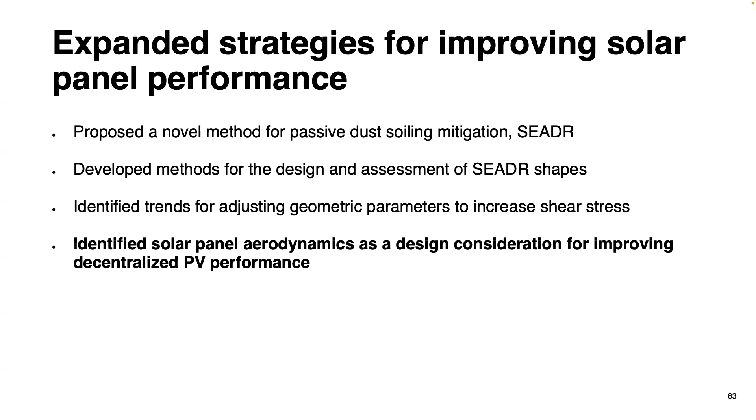We also identified solar panel aerodynamics as an important design consideration when we're designing these panels to improve the performance. This means that, for example, not only is increasing shear stress expected to increase the dust removal, as you might know, increasing shear stress is expected to increase convective cooling as well. And since panels are very sensitive to their temperature, increasing the cooling could allow us to have more efficient panels potentially. Additionally, solar panel aerodynamics are an important consideration when designing experiments, since a lot of times people are looking at ways to assess the soiling without looking at their panel aerodynamics, which we know could have a significant impact.

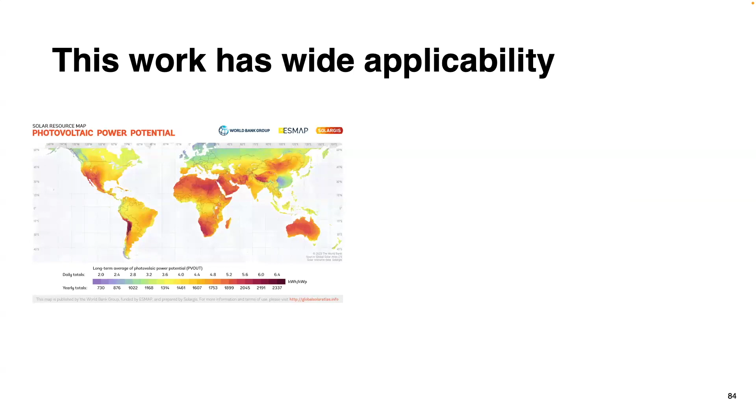I also want to make sure we know that this work has wide applicability. On the left chart is a chart of PV power potential from Solargis. The way to read this is that the deeper the red, the more expected PV power output you can get from the panels. So you can look at places like Atacama, places like Namib. These are all desert regions as well. And so you can expect that where there's PV power, you're probably also in the desert. And when you're in the desert, there's probably also dust. So the methods we've developed today can be applied to these other regions that might also suffer from not having very accurate data. They can be used and applied to make sure you understand what the dust impact is going to be in your particular location.

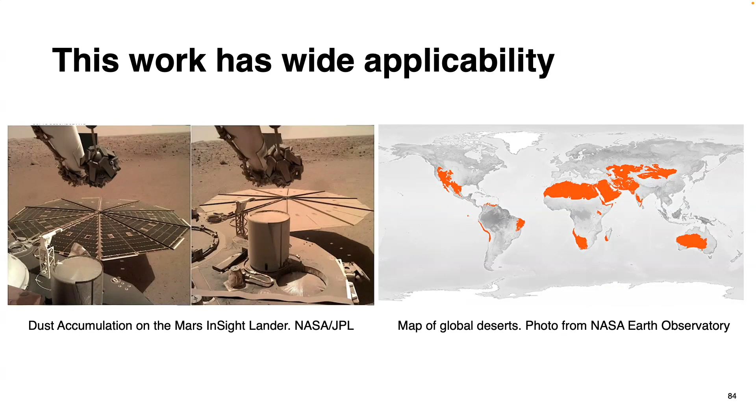It does not work. One of the major themes of the work that I've done is that technology often designed in the global north, when applied to these regions, often performs poorly or unexpectedly. And we saw this in the data sets where we tried to apply the data sets that we're using, calibrated on global north data, they weren't very accurate. I saw this when I worked on the incubator project. The incubator systems actually didn't work very well because they assumed very different environmental conditions.

The solar panels could be the same way too, where if we change the shape, for example, we can improve the dust mitigation impacts, but there's other things we need to address as well. PV systems operating in the region have higher degradation rates, battery performance is much worse, and overall they have lower conversion efficiency. So it's not just the shapes, we need to rethink the entire PV system, the installation, the design objective, the materials. We can begin to rethink all that to make sure that it meets the particular needs of the region. And in particular, we need local people to be at the forefront of that as well.

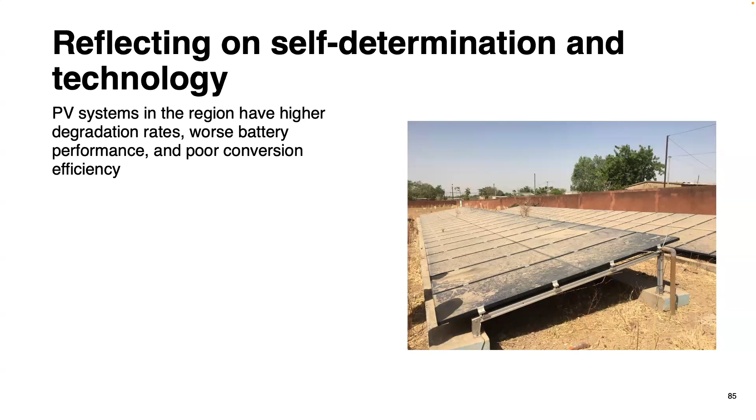What we saw with the incubator project is that the way we brought it to an end was actually collecting the expertise of different people in the region, experts in PV, incubation, electronics, solar panels, in order to get to our final solution, a locally designed solar-powered chicken egg incubator that can be built and used in Burkina Faso to meet their needs. People need to be within the design and other technology processes in order to get energy technologies that can directly meet their needs. This is something we're continuing to work on.

I'm continuing to work with Dr. Gina Montague, where we actually are developing solar assembly capability in Tamale. That initial picture I showed you that collected dust was actually a locally assembled solar panel. What this is doing is creating the technical foundation within the community so they can begin to innovate in order to produce energy technologies that will better provide for their own needs.

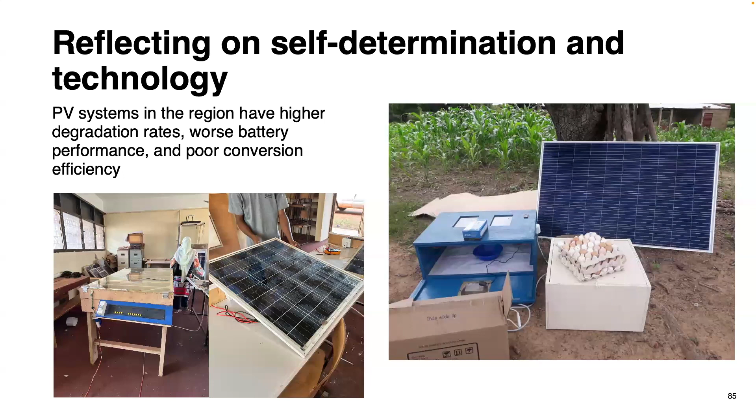One of the reasons that we have the dire situation in terms of energy access is because these countries are still living in the vestiges of colonial extraction, or sometimes the presence of colonial extraction. And these communities struggle to produce their own energy technologies because of the way that global power is distributed. They didn't have the resources, both technical and capital, to be able to produce the energy technologies that they needed.

And so, even though I've been working really hard, I really care about this problem, I think I have innovated in a way that I want to support people in the region. I know that the technical application of my work is only part of the solution. It's not the true solution. To really address it, we need to do something about this as well.